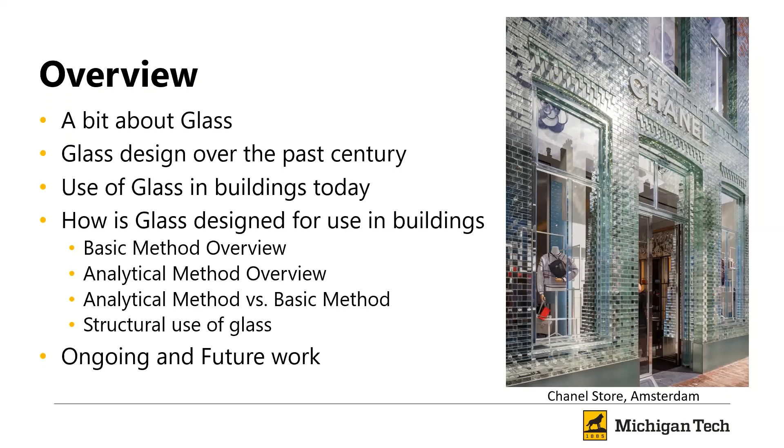We're going to do a quick overview of what we're going to talk about today. I've geared this presentation with the assumption that most people don't know a lot about glass or how we design glass. So I'm going to go through some of the common design procedures used in the US currently, and then discuss where we're moving on the committees as far as adding expanded ability to design new things. I'll also talk a bit about structural use of glass, because it's becoming very popular. For example, the Chanel store rebuilt a few years ago in Amsterdam has an entire front facade made of clear glass blocks assembled together, making a very striking, mostly transparent facade for that building. Really neat.

All right, so let's talk a little about what glass is. I'm going to talk specifically about soda lime glass, which is what we typically use in architectural and structural applications. First and foremost, it's a brittle material, meaning it deforms elastically up until a point and then fails, often without any notice or indication that it's about to fail. It usually fails at relatively low stresses. So as far as a building material goes, this is not an ideal material to use for structural design.

Over the past century or so, glass has typically been used to separate the outside from the inside—in other words, windows in buildings. Before the 1950s, this product, glass, was basically just specified by the manufacturers that created it. Between the 50s and 80s, there was a big push to come up with some sort of design procedure that designers and engineers could use to specify glass for buildings, moving it away from just being a product provided by a manufacturer.

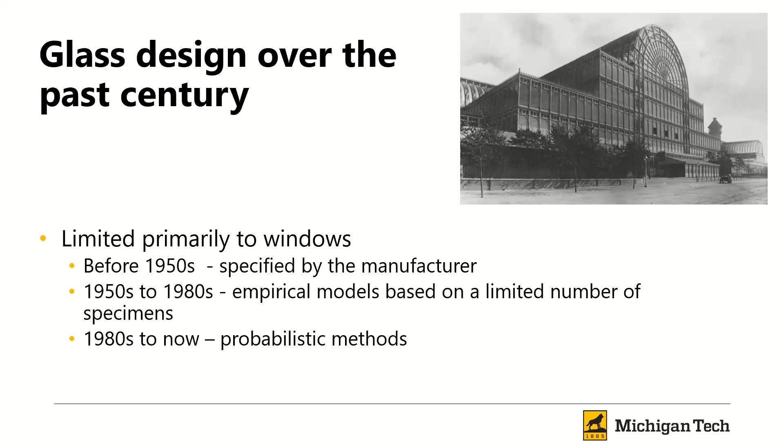Before we get to that, I want to talk a little bit about how glass is used in buildings, and what are some of the common constructions that we see.

So we can have a single glazed, or just a single piece of glass. This is more typical of what we saw years ago. We were just trying to close that opening for a window, and we weren't as concerned about the thermal conductivity of heat loss through our glazing.

Well, that's become something that's very important to us because we want to try to make these buildings as energy efficient as possible. And so as we kind of advance, we switch to what are insulating glass units.

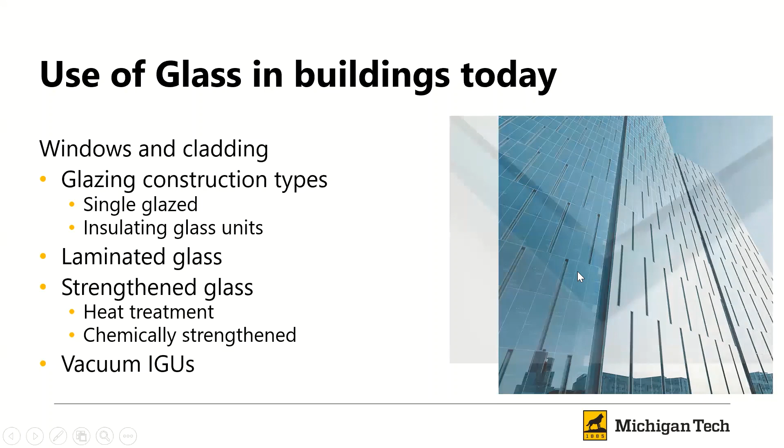And that is defined as where we have multiple plies with airspace in between them. Because the temperature and thermal radiation has to transfer from different materials as it passes through, it does a really good job providing insulation. So most contemporary houses and structures are going to have some form of insulating glass units in them.

Another type of glass that we see used in buildings is laminated glass. This is where we have two pieces of glass with a plastic interlayer in between them.

And with that, it provides some safety performance to where...

Oh, okay. Hold on while we address that. Anyway, I'm going to keep going.

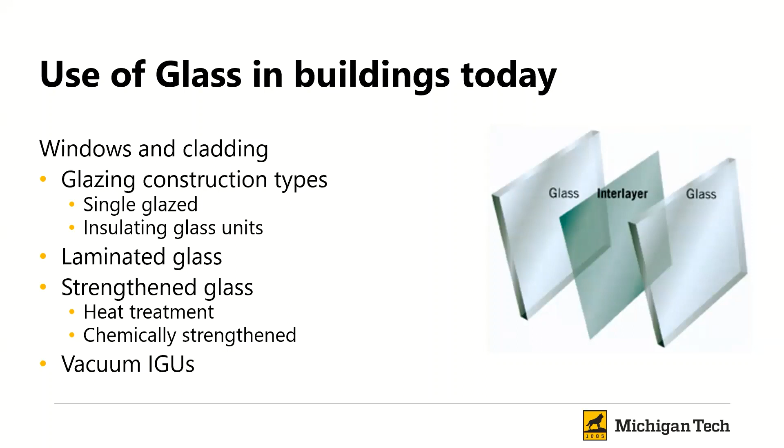And also provides some post-breakage performance advantages. Whereas if we break a piece of laminated glass, it generally stays all in one piece, and we don't have glass falling out of the building. So some nice attributes there.

We can also heat treat glass, and with heat treatments, we start with basic annealed glass, and this is where, when you throw the baseball through it, you have these big shards that fall out of the window.

As we do heat treatment to it, we can get all the way up to what is tempered glass, and this is what we think about most commonly when one of the car windows on the side of your car, in the door, breaks, and it breaks into little bitty pieces, okay? So that is because of that heat treatment.

Something that's become much more popular in the past few years, especially for small personal electronic devices, is chemically strengthened glass. This is where they take thin pieces of glass and through a process can strengthen the surface of the glass. We're going to talk about how that works here in a second.

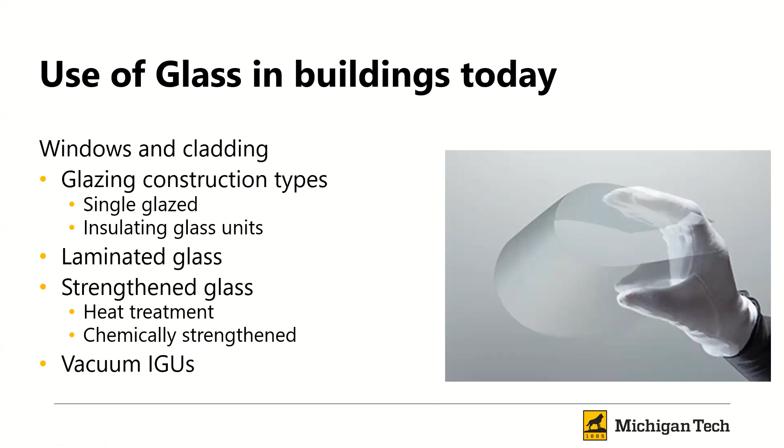And then something that has become more prominent over the past 10 years or so is what is vacuum IG units. This is kind of an advancement over the insulating glass units where we had air in there. We're going to take this a step further, just like we use with our insulated mugs and so forth.

We're going to take those two pieces of glass and create a vacuum in that interior space. In order to make that work, we have to have little pillars that keep the glass separated, okay? So now, because we've removed the material between the two pieces of glass, it really limits the amount of heat transfer that can pass through the glass.

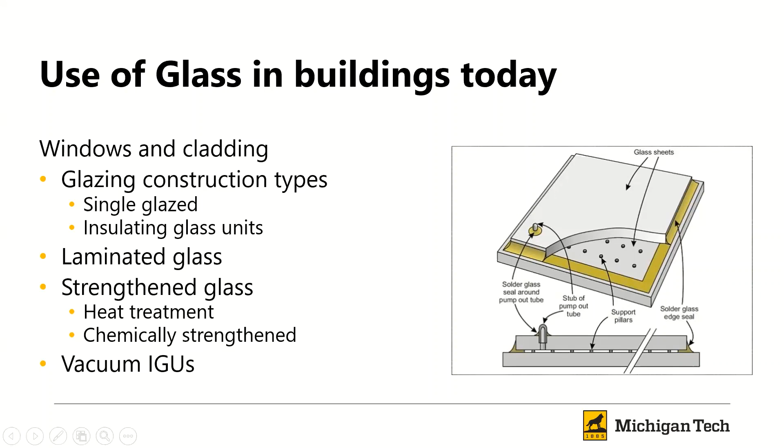And the advantage of these compared to insulating glass units is that they are very thin, for the same amount of thermal insulation, if you will.

So for our discussion today, I'm going to define architectural use of glass as basically windows and our doors, where we are separating the outside environment from the inside environment of the building, okay?

Generally, they are designed to resist their own self-weight and environmental loads, so wind loads, snow loads, anything else that would impact a window or a door under normal use, okay?

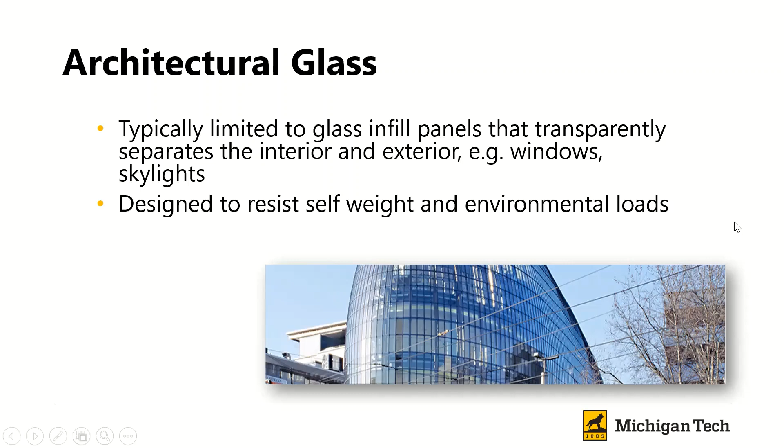So some prominent examples that we've seen over the last few years, the Shard in London.

Oh, okay. Now we're there. They don't have me. But they have this, hopefully they have that. Yeah. All right, now I'm back. Hi.

Inside is shops and community spaces where people can hang out. It's kind of a neat space.

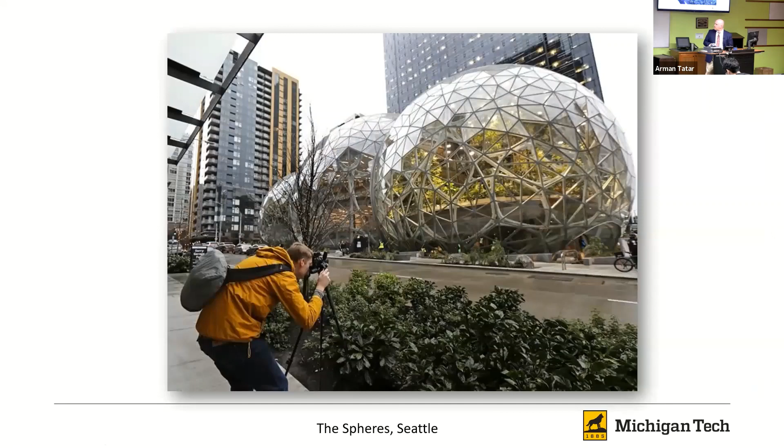And then some other ones that we've seen recently, the Spheres in Seattle, the Amazon Spheres. I recently had the opportunity to visit this, and it is a very striking building, both architecturally and just the glazing with it, because there's quite a few different pieces of glass, and most of them are triangular, but not all of them.

So it's a neat looking building, and if you get a chance, you should go check it out.

For our purposes, we're going to say structural use of glass. What is different is that this is going to be glass components that are going to carry load from something else. They could carry load from adjacent members that they are supporting. For example, we have glass fins supporting a tall glass facade, providing lateral support for those individual exterior windows. All sorts of different ways of using this, but the key thing is that in addition to its own self-weight and environmental loads, it's going to resist loads transferred from other elements.

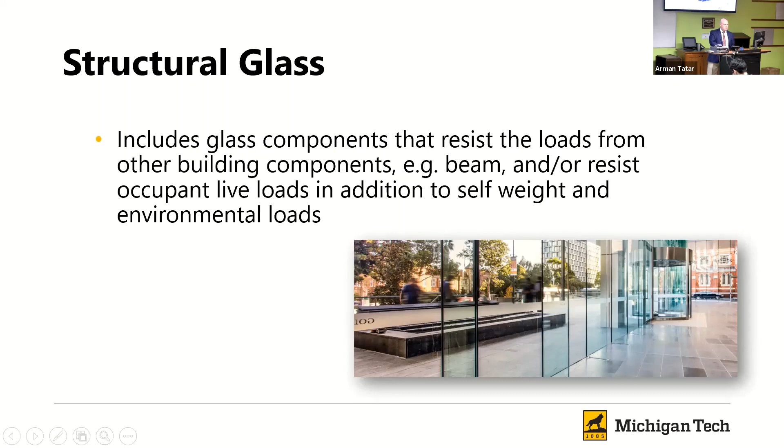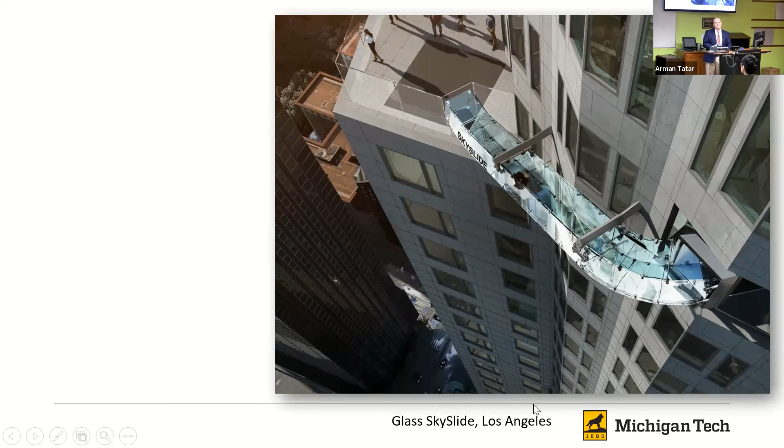Another one is the SkySlide in Los Angeles. You can go up to near the top of this structure and slide down from one floor to the next. Albeit on a blanket, but it's pretty amazing to be sliding down a glass floor. As you can see, they're literally just hanging over the side of the building here.

And so what we want to do is figure out how do we do that safely. So let's talk about glass strength in general, and what is the reason why it fails at such a relatively low tensile stress.

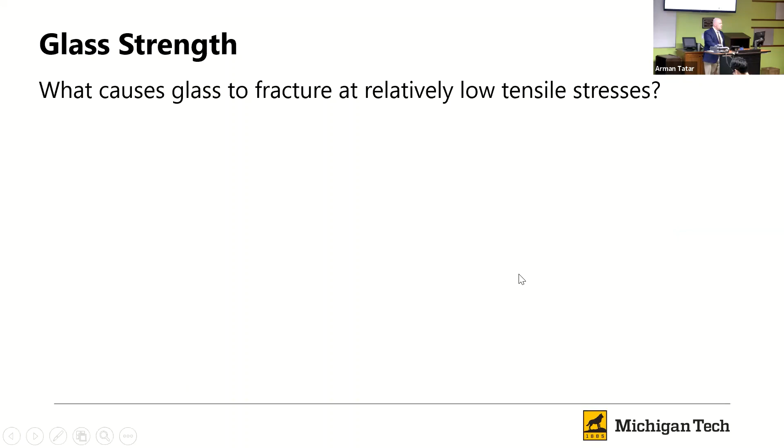The primary reason is that all over the surface of glass, we have these microscopic flaws in the surface, and those can be caused naturally as the glass solidifies. They also can be changed or modified or added through in-service conditions. That could just be from the environment interacting with the glass, or it could be cleaning or touching or otherwise—all sorts of ways.

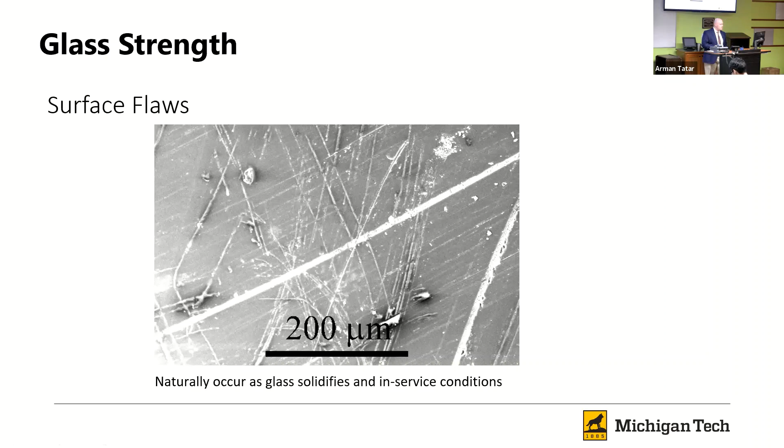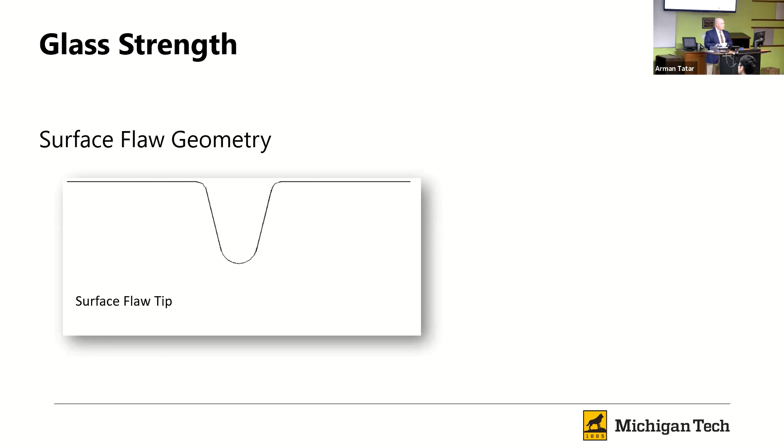But basically we have these little flaws, and what goes on with these flaws, we kind of model this as a side view, zoomed in, looking through the thickness of the glass. We have this little flaw here, and if we provide some tensile stress, that's going to tend to sharpen the tip of that flaw. And if we create enough tensile stress and get that flaw sharp enough, then we're going to have a large stress concentration, many times over what the original tensile stress was, to the point where we create fracture, okay?

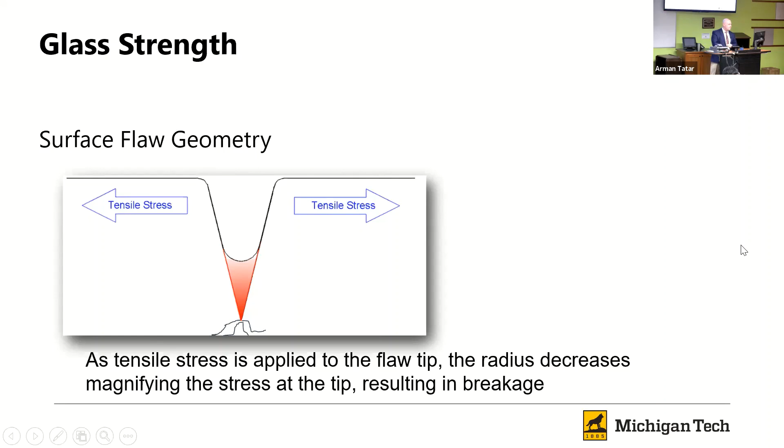So if we could eliminate these flaws, then we would have much stronger glass. And in fact, when we chemically strengthen glass, that is what they are attempting to do—to use, among other things, certain salt mixtures to basically fill in some of these flaws where we're not allowing them to grow. They're still there, but we've kind of covered them up, if you will.

All right, so how will we go about designing? Now we don't really know where these flaws are going to be. We don't know if they're going to be at the point of our maximum principal stress. This becomes more of an issue when we work with structural elements, because we're going to have all sorts of different edges and stress orientations that would be different than the way we deal with windows or plates of glass.

So one option would be: we can pick some limiting stress that we think is going to be okay, and we can just assume that the fracture is going to happen where the maximum stress is located, okay? But what we find, especially with windows, and especially for annealed glass, is that when we break glass under load, it doesn't always fail there. In fact, it often does not—the fracture origin does not occur at the same spot our maximum principal stress was at. And so that causes us some concern, because we may actually be failing at a lower stress than our maximum principal stress, and furthermore, at a location other than the maximum principal stress. So that makes it a little more difficult.

We also find that not only does the magnitude of the stress matter, but also its orientation. If our flaw is oriented such that the tension is running parallel to the flaw, then we're not changing that flaw tip. It has to be perpendicular.

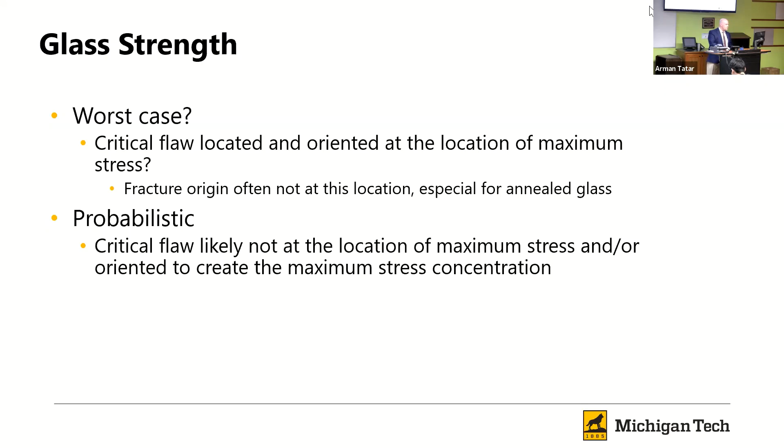Anything that's off angle from that is going to lower that stress concentration. So where we get into that is, can we use a probabilistic method?

In the States in the late 80s, a standard was advanced, ASTM E1300, to address how we specify the thickness of glass to use in buildings. It was based on a probabilistic method, and it was pretty limited. I've listed the limitations of the current version, which is 2016, which right now addresses uniform lateral load.

That works great for windows in general, but not so much for structural elements, because those have point loads. They can have all sorts of different loads that are not uniform lateral loads. In addition, it applies to monolithic and laminated glass, but only rectangular shapes.

We've all seen, in fact I've just shown some examples of glass on buildings that was not rectangular. So how do we deal with that? Currently it addresses rectangular glass supported on 4, 3, 2, and 1 side. We've tried to open that up, but it's still pretty restrictive.

It also addresses insulating glass units for 4-sided support only, and it specifically does not apply to balustrades, glass floors, aquariums, structural glass members, and glass shelves. So clearly we can't use this to design our structural glass elements.

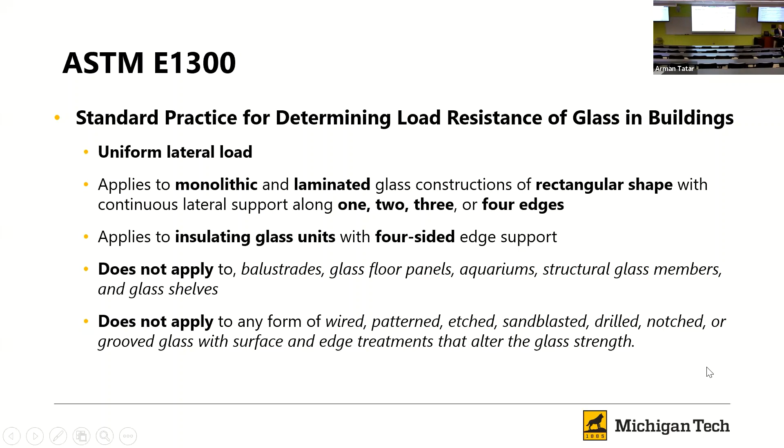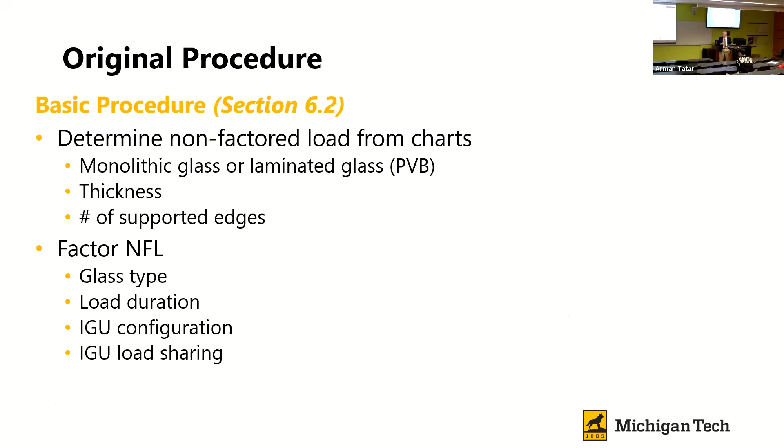So up until 2016, the original procedure was that we used a series of charts - I'll show you one of those in a little bit - based on the different standard thicknesses that plate glass comes in, and also the number of supports that it's supported by.

Basically we'd go in there and get a non-factored load from that, then go through a series of steps to modify that non-factored load for glass type - if it was heat strengthened or fully tempered, if it had a longer load duration than a typical wind load. Also we had an IGU configuration, so different thicknesses of glass in our IGU, and the load sharing for those different thicknesses. All of those pieces were in there for factoring.

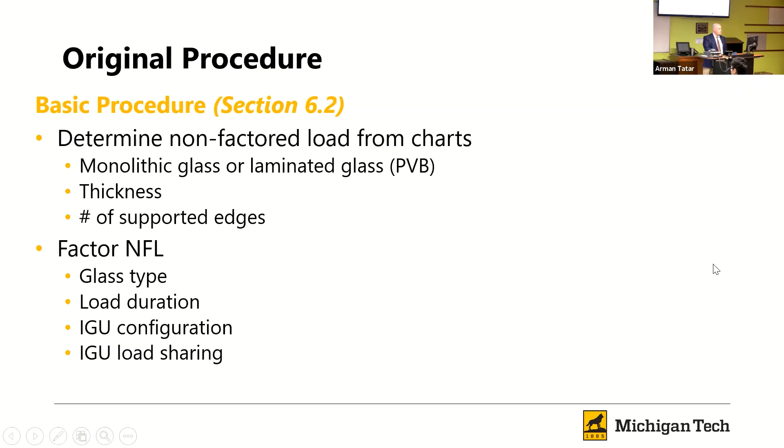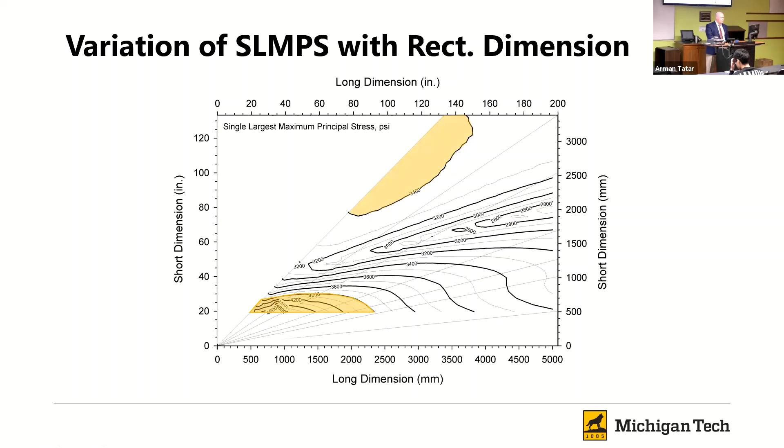So there is not a single stress that we're designing glass with, and this is kind of an artifact of that probabilistic method that we've been talking about. I'm going to go into a little more detail on that shortly. All right, so a little sidebar there.

After we have our non-factored load, then we would use factors to address for heat treatments, also for load duration. We have separate charts for laminated glass because the presence of that interlayer changes the way the stresses pass through the interior of the glass, or through the thickness of the glass. And then we have a relatively simple model to deal with load sharing between our two pieces of glass, depending on if it's a double or triple insulating glass unit.

And so each of these things has its own limitations, but we've been using this method for about the past 30 years, and glass isn't falling out of buildings due to wind load. And so we feel like this method has been working just fine, but recognize that all those limitations we had at the very beginning, people want to do larger pieces of glass, different geometries, different constructions.

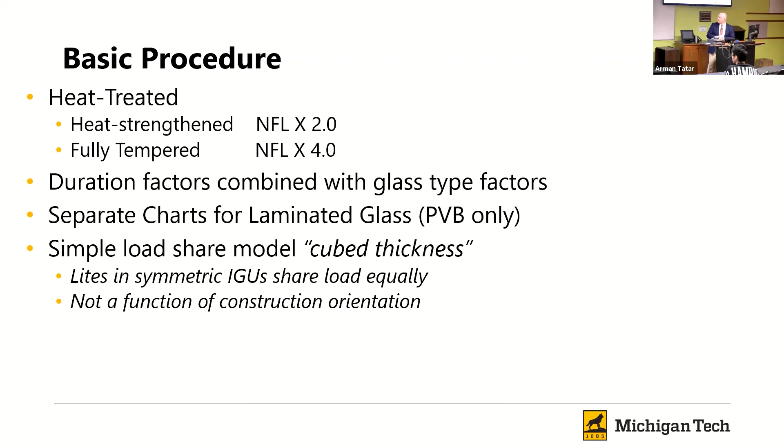We have new products that are coming available, like different interlayer materials that have other positive attributes that we'd like to take advantage of, that just aren't addressed in the basic method of the standard.

So to address that limitation, the committee that oversees the standard worked over the past few years to create what is an analytical procedure. And basically, we gave the user the methodology that was used to create those original non-factored load charts, so they could use it directly with their own in-house stress analysis software, say like finite elements. And they would basically have the methodology to either recreate a chart if they wanted to, but most importantly, use that method directly for whatever kind of configuration they have.

So for a couple of reasons I'll mention: it was limited to 4-side support glass. And it does directly let you use the glass failure prediction model, which I'm going to show you a shortened version of really quick.

And then we also allowed, instead of just using a simple factor of 2 and 4 for different heat treatment types, you can measure the residual compressive surface stress of heat-treated glass, and you can use that directly.

The way the standard is written is that heat-treated glass has minimums for residual compressive surface stress for those to be considered either heat strengthened or fully tempered. And the standard requires you to use the minimums for design because you don't know what you're going to get.

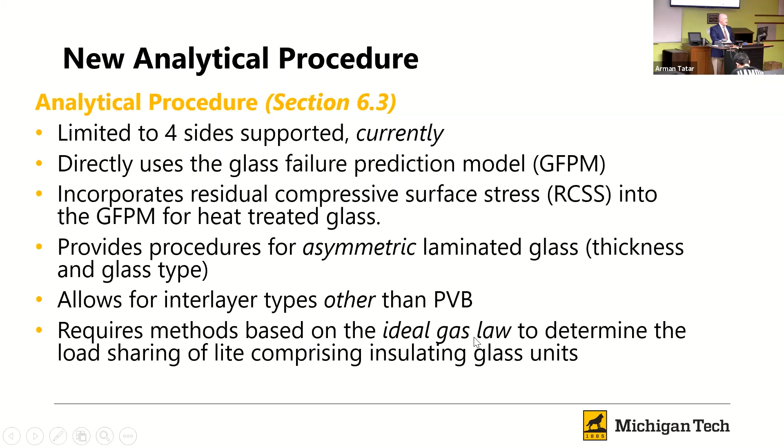The idea here is that when we apply a load to one ply, it compresses usually the airspace in between, thus increasing the interior pressure, and then that is transferred to the second piece of glass. There's some equilibrium that occurs there, and it follows the ideal gas law, because just as we reduce the volume, pressure goes up. The other lite is going to deform a little bit, so then we're lowering the volume, or we're increasing the volume again, so pressure comes back down. You get the idea, okay? So we need to take that into account to get accurate load sharing estimates between the 2 pieces of glass.

Something I haven't touched on is that the original standard was predicated on a probability of breakage of 8 in 1,000, which sounds like a really weird number, but that's the number that's in there. The idea would be that we had to perform our glass failure prediction model calculations and figure out, for a given geometry - rectangular dimensions and thickness - what was the load that would give us a probability of breakage of 8 in 1,000? So that's kind of an iterative procedure to guess.

But for our purposes, when we're going to use the analytical procedure, we don't really necessarily care about what the full load resistance of the unit is. We just want to make sure that whatever we have for the load we applied to it has a probability of breakage that's less than or equal to 8 in 1,000. If we have that, we're done.

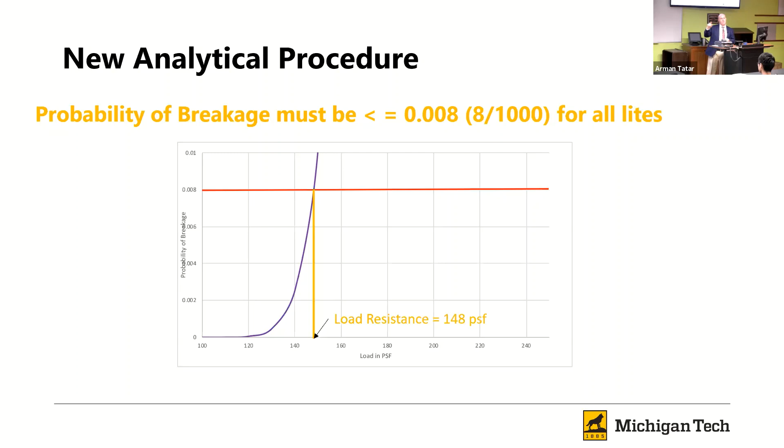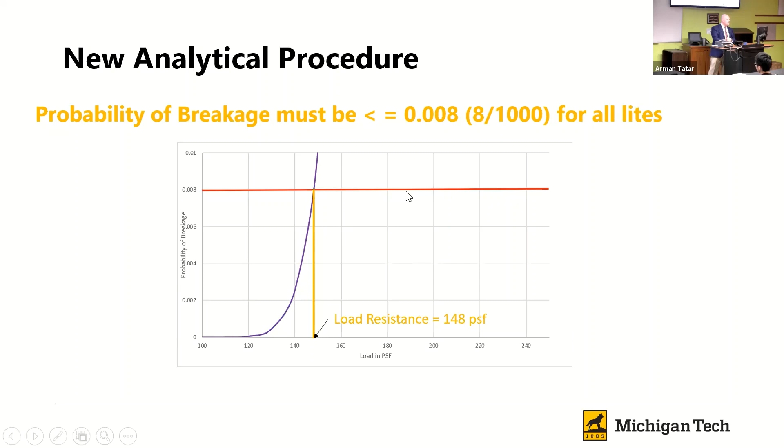Now, if we were curious about what the capacity would have been, then we could go through this process and walk it up and figure out what is the magic load. Depending on the construction, that may be 5 PSF away, that may be 10, 15, 20, depends on what it is. So it can be something close, or it can be something quite a bit higher depending on where we're at. So this is that glass failure prediction model that I was mentioning.

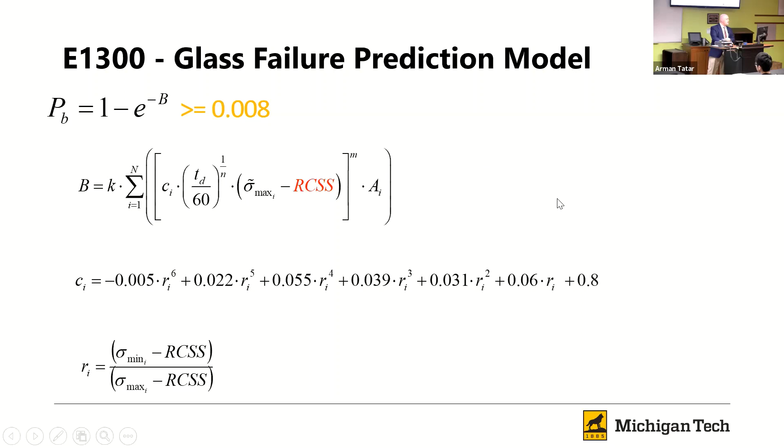I'm not going to go into a whole lot of detail with it because nobody wants to look at a bunch of equations. But the key things here are that we see duration, that's TD, so we can take that into account. We have RCSS here. We also calculate the representative areas and stresses associated with those. So this is where our finite elements packages are going to come into play. And then we just have to sum this up in the calculation.

Without a whole lot of effort, one could translate these equations into a quick little Excel spreadsheet calculation. All you have to do is do your analysis in FEA, copy those stresses and areas out of that program, paste them into your Excel spreadsheet. Voila, you can calculate the probability of breakage. So that's not too bad, even though these equations look kind of nasty.

This C here is a polynomial that was created to represent the biaxial stress correction factor. That's what this actually does. And this has to do with adjusting our probability for whether or not our stress is at a particular angle with respect to the flaw, okay? So it's kind of taking that into account. And it's based on the ratio of the minimum and maximum principal stresses.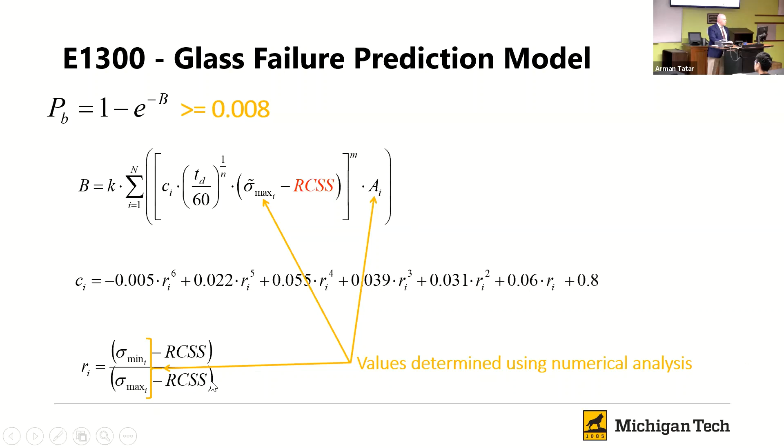So again, this is the same procedure that was used to generate the charts that are in the standard.

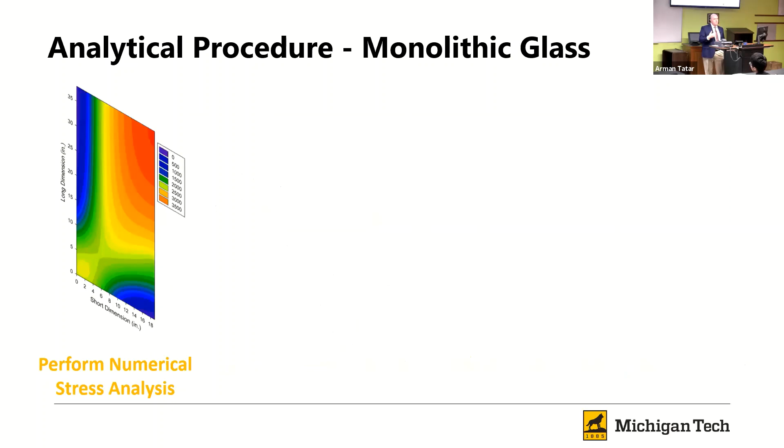So how would this work? For a piece of monolithic glass, a solid piece of glass, we're going to perform our stress analysis. We're going to plug that into our whiz-bang spreadsheet that we just made. And we're going to check and see if we're less than or equal to 8 in 1,000. If we are, we're good, we can move on. If we're not, then we need to make a change to our design, either make it thicker glass, heat treat the glass, do something to get that number to come down. So we have some options there. I'll show you some examples here in a little bit.

For laminated glass, we have two methodologies that the standard allows you to use. One is the effective thickness model. Because layered plate analysis is somewhat complicated, and we need to be able to model that interlayer appropriately, you have to have a fairly sophisticated FEA package to do that accurately, and it also tends to take a while as far as doing the calculation.

So what the standard allows you to use is a fairly simplistic method: come up with an equivalent monolithic thickness that would be representative of the laminated glass. Then we can use FEA with monolithic glass and these effective thicknesses to do our stress analysis and check for deformation.

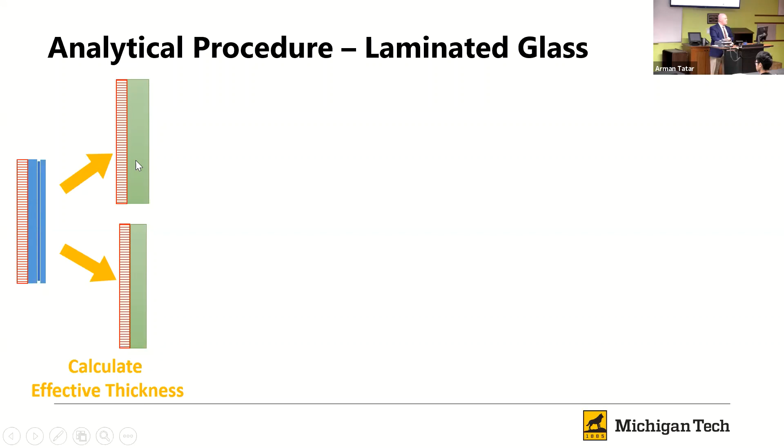So I have over here an asymmetric laminated piece of glass, and with that we would expect our two effective thicknesses to be different, and then we perform that stress analysis. We plug that into our spreadsheet to do the glass failure prediction model, and we use the principle of weakest link: whichever one gets to 8 in 1,000 first is the one that limits our design.

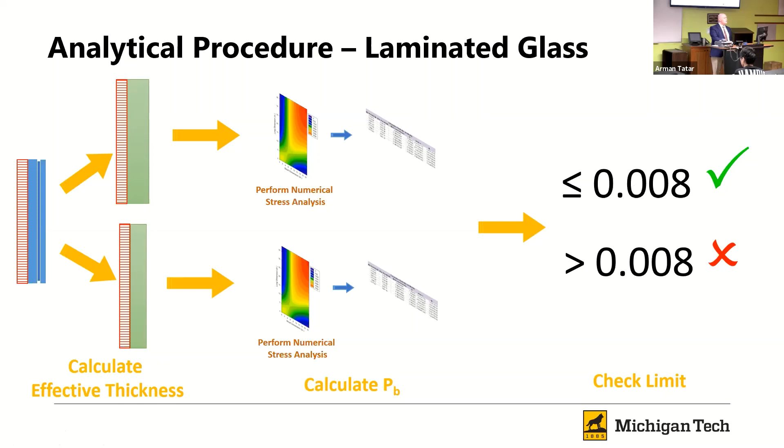So we just take the largest of these two probabilities of breakage, and make sure that is less than or equal to 8 in 1,000. If either one of them happens to be larger than this, then we have to make a change in our construction because one of the plies doesn't meet the requirements.

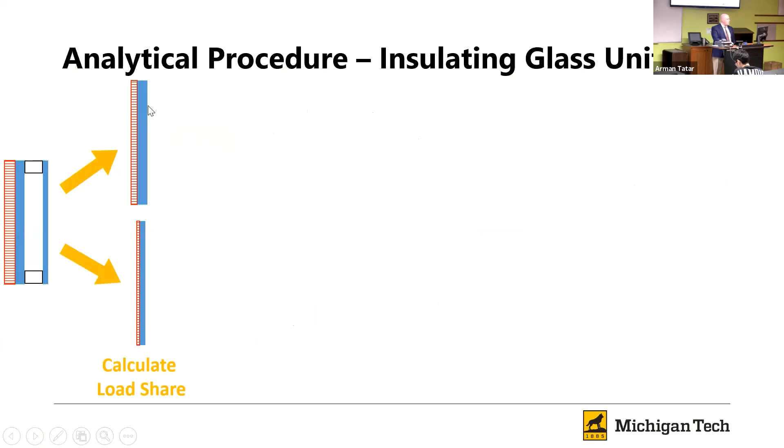We'll see a similar procedure when we use insulating glass. With insulating glass, we now have two different pieces of glass that we have to analyze, and we also have to deal with the load sharing between those. Very simplistically, if both pieces of glass were the same thickness, they would share the load somewhat evenly—not exactly, but close to 50% each. As those become different shapes or different thicknesses, that moves around.

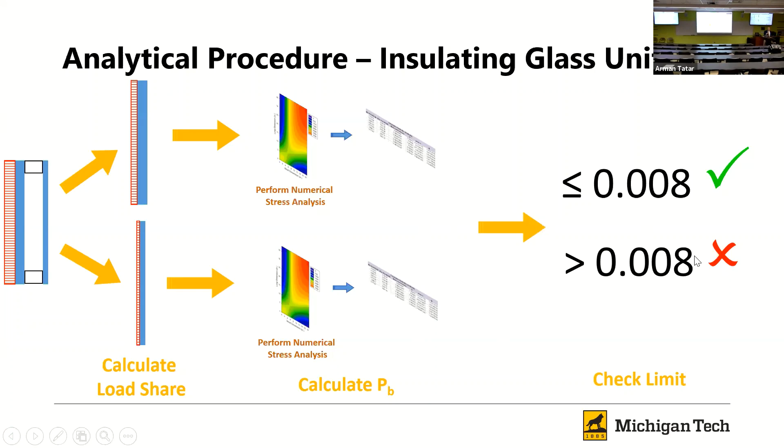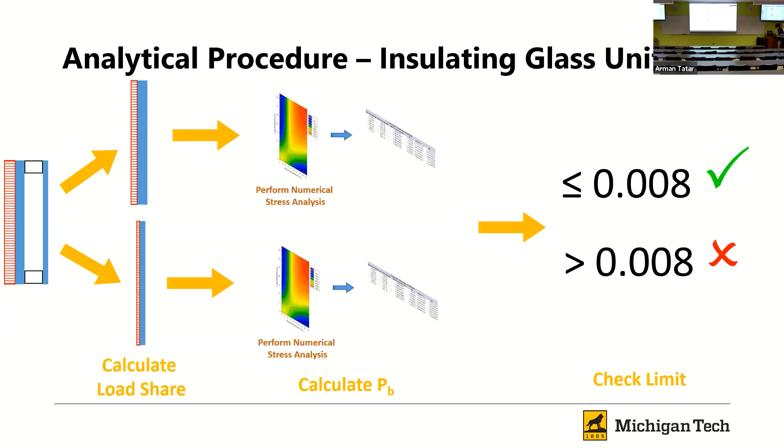Then we perform our numerical analysis, and again, same principle: weakest link is where we check the largest of the two pieces of glass and make sure we're at less than 8 in 1,000. So that's not too bad. We could see that if one of these was laminated, we would have to branch out and do 3 stress analyses to make that happen, potentially if we're using the effective thickness model.

The other alternative is to model the laminated glass directly as a layered system, and then you don't have to worry about doing the effective thickness model.

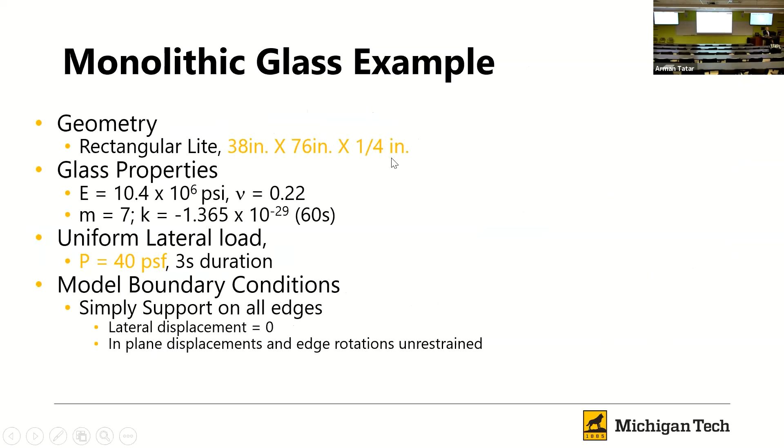So what would the procedure look like? Let's say I wanted to design a piece of glass that was 76 by 38 inches, 1/4 inch thick, and I want to see if it can resist a 40 PSF load. We key that into our FEA program of choice, and we get a whole lot of stresses, presumably in some sort of grid, depending on how you do it. So all I've done is table those values here. Don't expect you to remember all these things, but the idea is we have those, and we have the minimums, and we have tributary area that comes out of that.

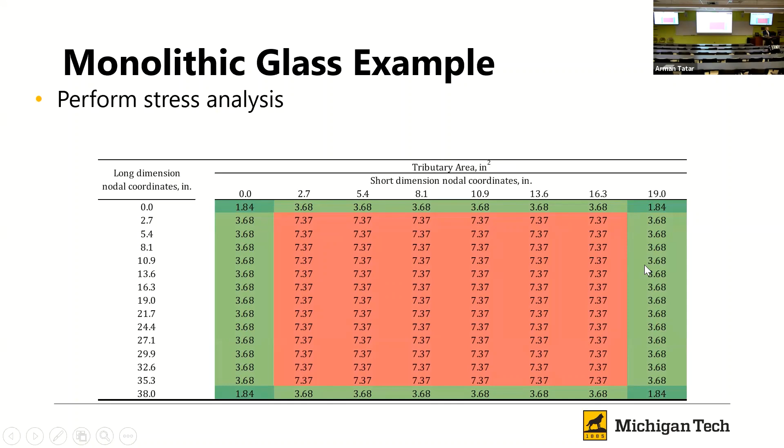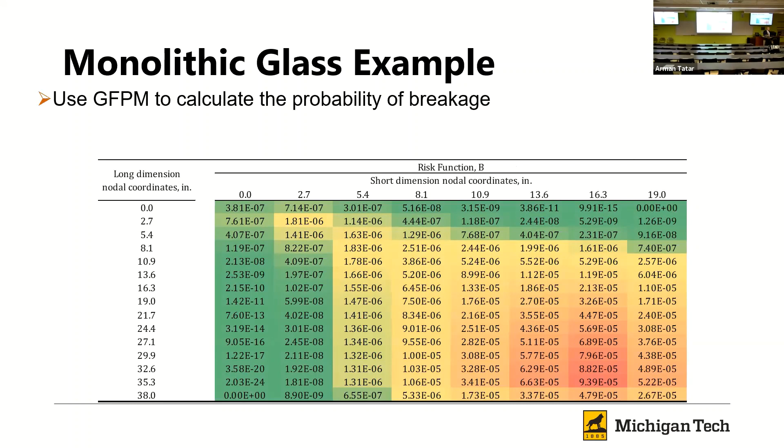In this case I used a uniform grid in my example. Then we plug that into our spreadsheet, and we use those ratios—the maximum, minimum principal stress at each point—to come up with our biaxial stress correction factor. That was C, right? Then we bring all that together into our summation, which was B, and then we can finally calculate our glass failure prediction model, or probability of breakage. In this case we came up with 6.48 times 10 to the minus 3.

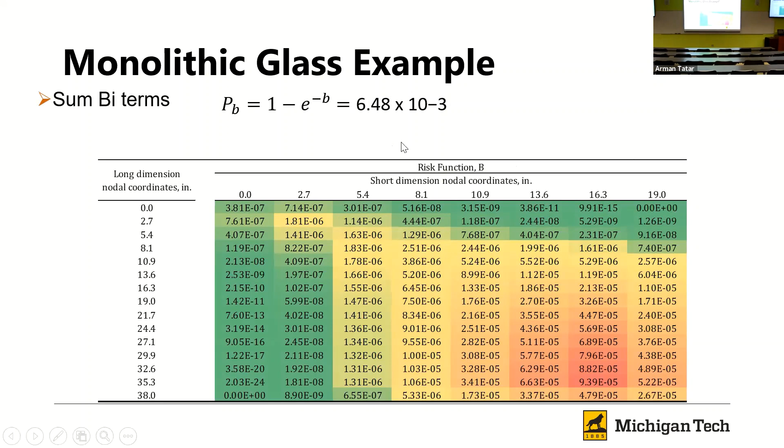Which is less than our 8 in 1,000, so this design works. It's close to being maxed out, so its load resistance is probably a little bit higher than 40, but not much higher than 40.

We perform those effective thickness models and calculated probability of breakage, and we see that one of the lites worked and one didn't. Interestingly, in this case, the thinner one did not work. But that's depending on how it works and what heat treatment you have, that can flip around.

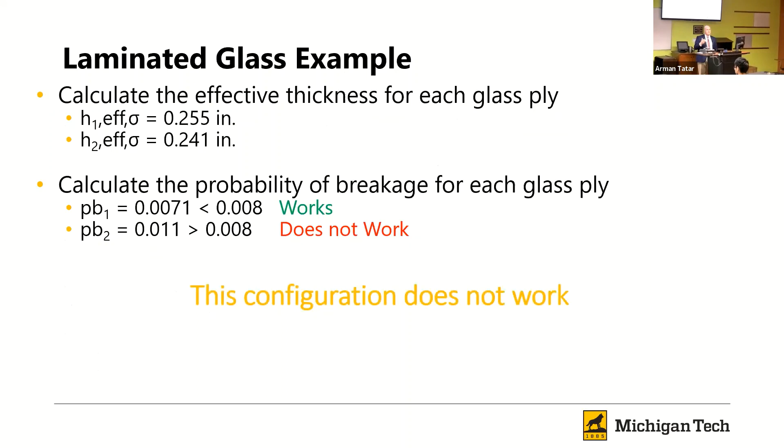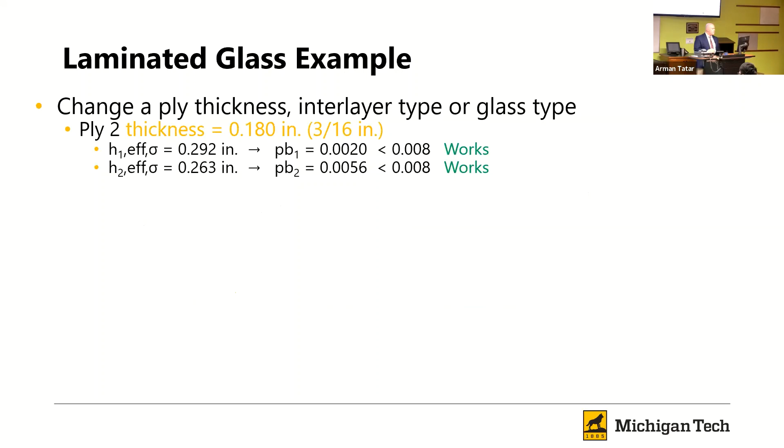So since that doesn't work, this design doesn't meet our requirements. So what can we do? What can we change to fix that? Well, I could increase the thickness, make it a little thicker. And we see that now that works. So just increasing one of the ply thicknesses fixed our problem.

Alternatively, we could have used a stiffer interlayer. So instead of using the PVB interlayer, I could have used something more consistent with an ionomer interlayer. And we see that G value goes way up, and now it works. So I didn't have to change the glass thickness, I just changed the interlayer I chose to use.

Also, I could have chosen to heat treat that ply. And we see that when we do that, that one goes way down, okay? So we have several different options there on how we can change the configuration and make the system work.

Previously, because it was just based on pre-calculated charts, we didn't have these options. Either we could heat treat all of it, but we didn't have a way to check for different interlayer properties or for different thicknesses of glass. We didn't have that option. We just had to choose a thicker construction.

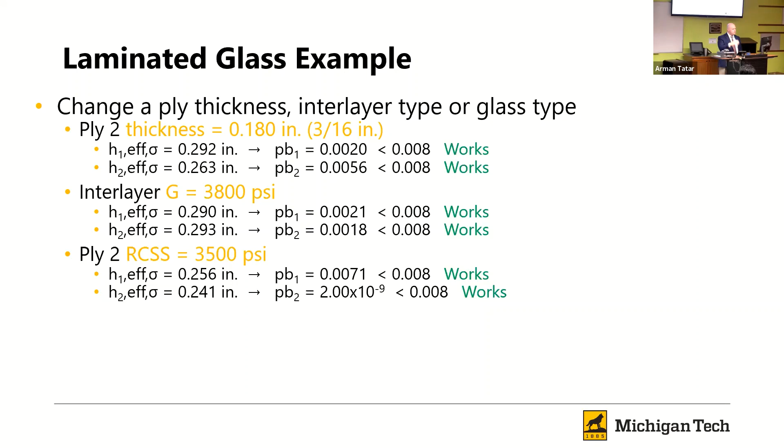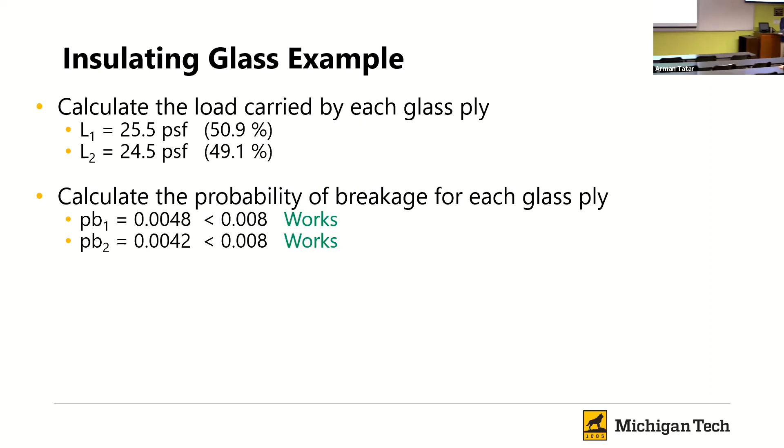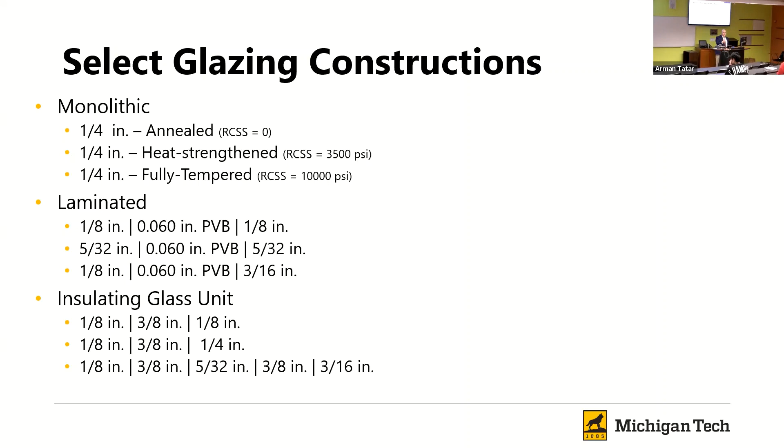So I'm going to give you a couple of comparisons. One of the questions is, you've got these two different methods, how do I know which one to use? I want to show you a couple of comparisons, going through these quickly, just to see how much difference it makes when we use what we had previously, the basic method, versus the new analytical procedure.

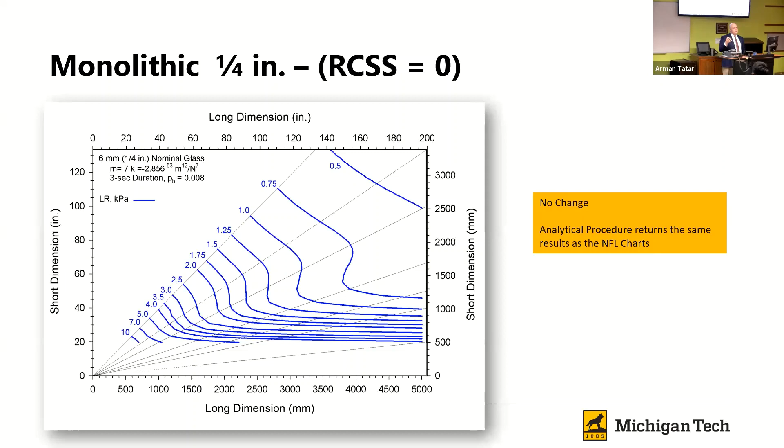So for monolithic annealed glass, there is no change, because this is exactly what the charts in the standard were, so there's not a difference there. This is the same chart that we had before.

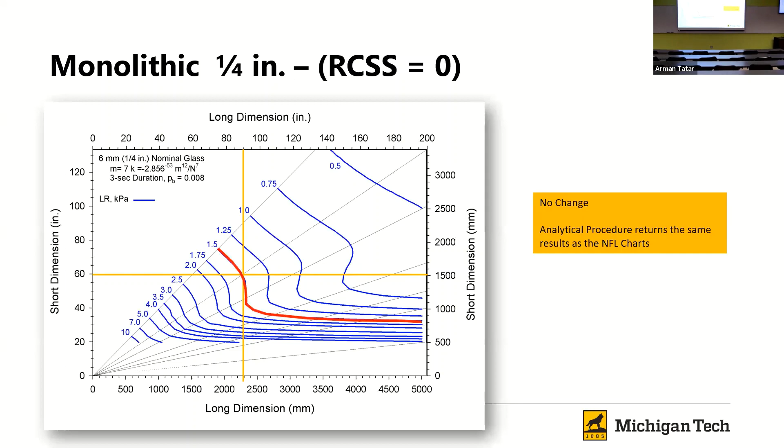Now, if I want to go to heat strengthened glass, the process there would have been we took the non-factored load chart and multiplied by 2. So we'll see all these numbers increased by a factor of 2, and I just redrew the chart, or really just adjusted the numbers. Then if we were to use the analytical procedure using the glass failure prediction model, where we now took the RCSS to be 3,500, which is the minimum required for heat strengthened glass, we see that we have load contours that look like this.

And so those moved up quite a bit. This was a 1.25, you can see it in green, barely down there. And then below is, and now it's up to a 1.5. So we get a sense that it increased, but it's not real clear how much or where it increased.

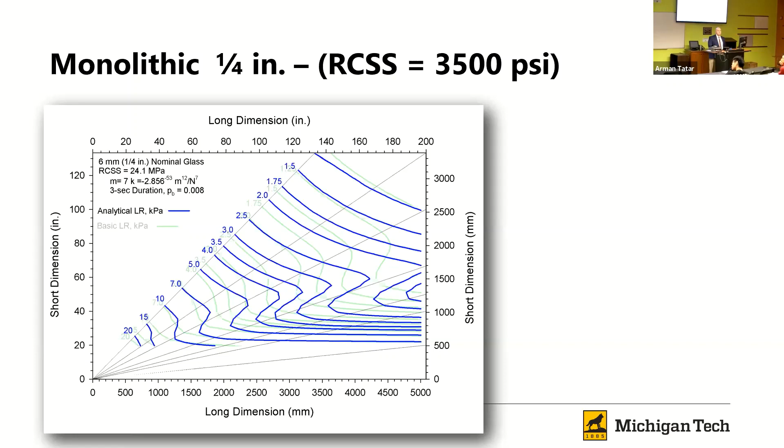Otherwise, just taking advantage of the RCSS and the glass failure prediction model gives us a pretty good boost on the strength of our glass. Now, it's not to say that the glass automatically got stronger because we changed the design procedure. The way I like to think about this is that we knew the glass was stronger than what we were designing it for through experience.

And what this method allows us to do is design our glass where its capacity is closer to reality than it was before. Whenever we design anything, we don't want to be in a situation where there's this big fuzzy area. We know it's stronger, but we're not real sure how much stronger it is. But we're pretty sure it's okay. And you can see how that can lead to making bad decisions potentially when you start leaning into that fuzzy area. So this is going to tighten that up for us a bit.

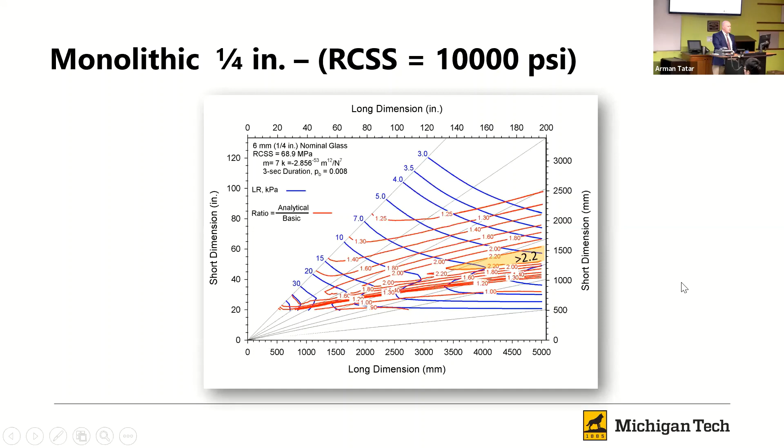Again, same principle, they don't leave it at the minimum. They usually go a little bit higher than the minimum to guarantee they don't have one slip through that drops below that. So I'm going to go through these a little bit quicker. If we compared the laminated glass to the charts, we see that the effective thickness model overestimates the strength of our laminated glass for aspect ratios around 1, up in this upper region of my chart. So that's not ideal, there's some issues there.

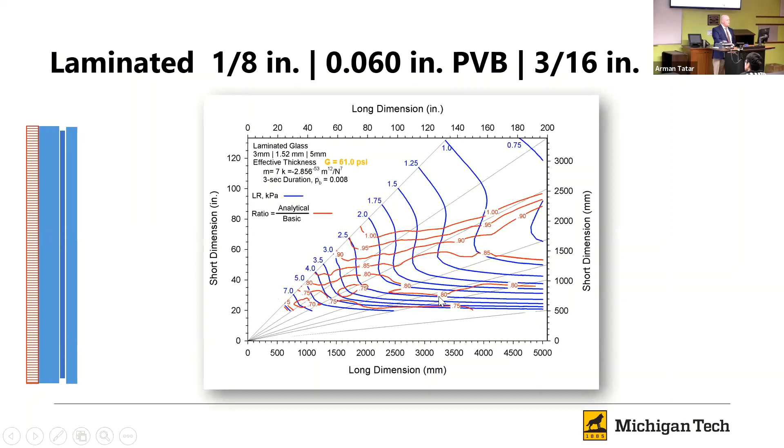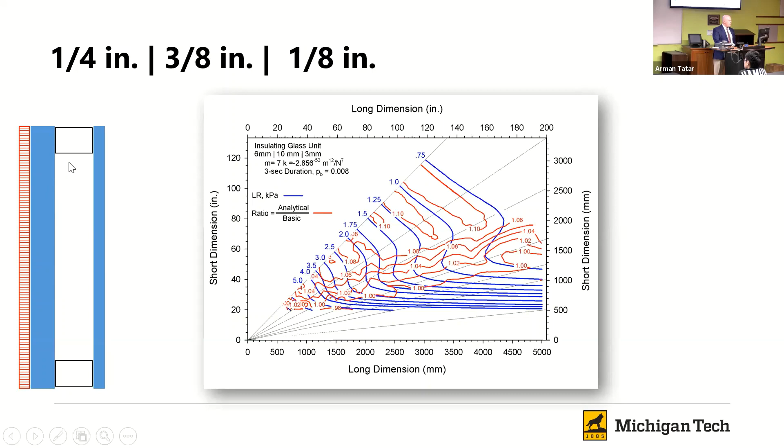In your residential usage of glass, your windows at home are usually symmetric. But we're seeing high-end high-rises going in with constructions like this, not always. In northern climates, we're going to see more triples because it raises the insulating factors.

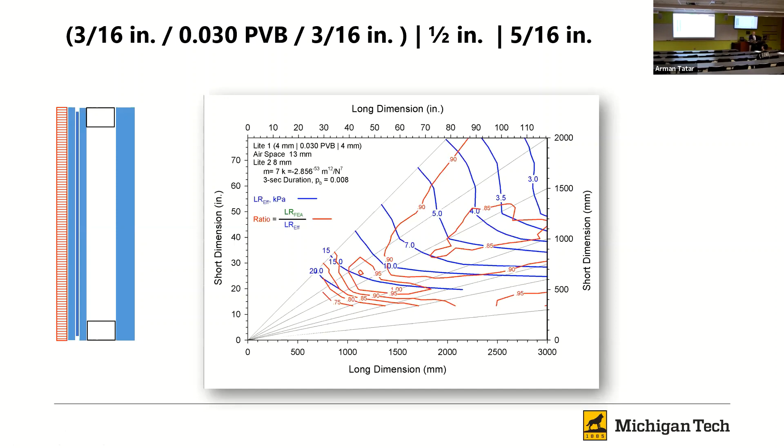In this one, I did a bit different analysis. I wanted to compare using the effective thickness method versus a full layered FEA model, to see how well the effective thickness model worked compared to a full FEA model. We see that depending on where we're at, there can be upwards of 10 to 15% difference, at least in this construction. Different constructions can show even more.

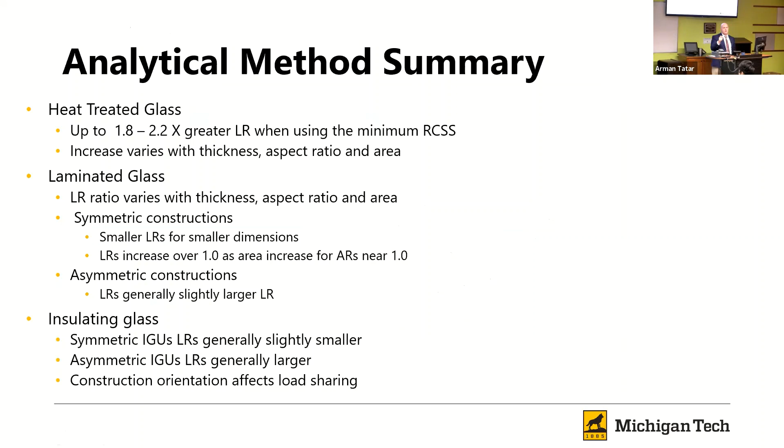So for a summary: the analytical method models heat-treated glass stronger, closer to its actual strength, but still conservative. Laminated glass can use different construction types, and so on. For insulating glass, dealing with our sealed airspace directly using the ideal gas law, we get better load sharing estimations between our pieces of glass. Those are important.

I want to give a quick update on what's coming up in changes to the standard - stuff that's in the pipeline. I mentioned before that the charts in the standard were limited, and people wanted to use larger pieces of glass. Part of that is a response to float lines getting a little bigger, and people being able to transport larger pieces of glass to the job site.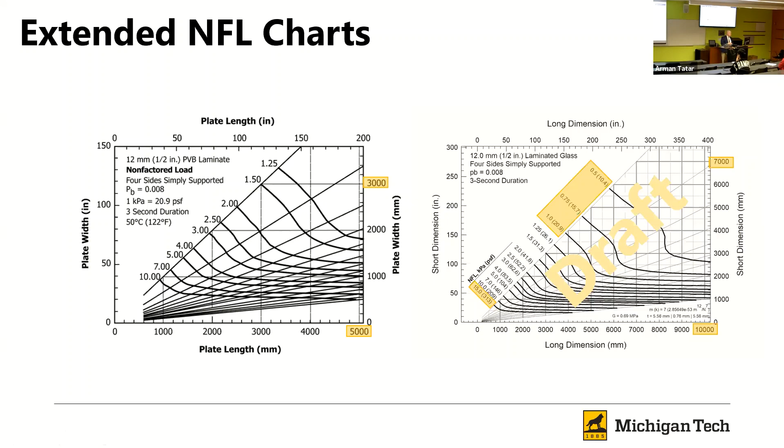But it's better to have the chart a little bigger than to come back in a couple of years when people do start making glass that big, so we don't have to redo the charts, since this is just an analytical calculation. So we can go as big as we want for the most part.

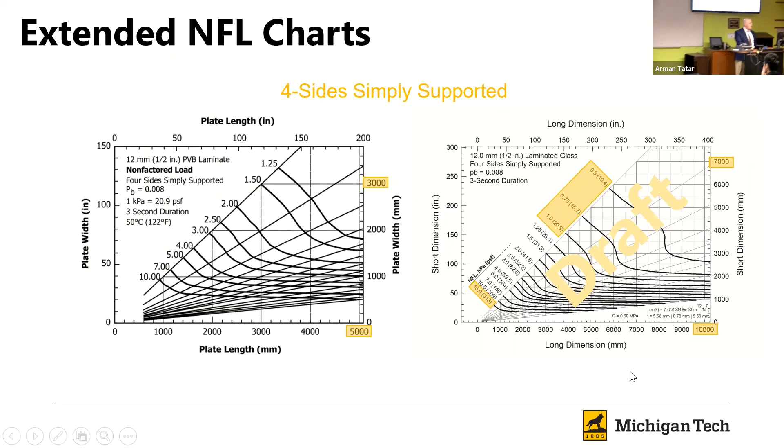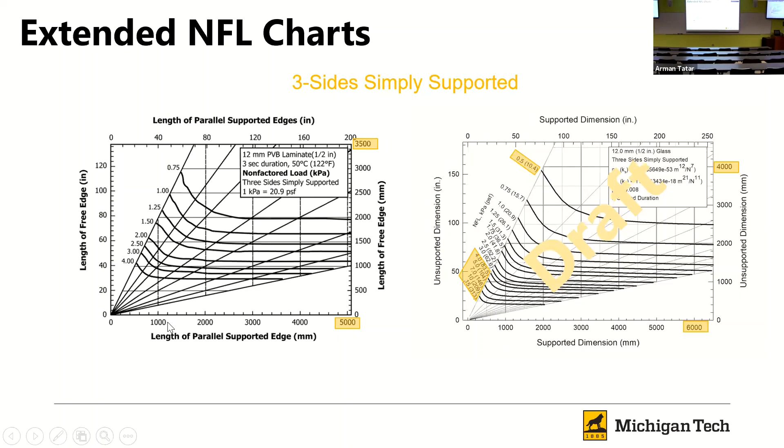So this is 4-side simply supported, and this is our 3-side simply supported chart. Notice we have a slightly different shape - the aspect ratios and extent of the chart change a bit between the supported chart and this one with an unsupported versus supported edge. In that one we added more lines, so depending on if you're outside up here or down here, you can still design those.

For 2-sided, we had a series of straight line charts based on pretty much just beam action alone. The reality is if you have a plate supported on 2 ends with a uniform load, it's going to principally behave like a beam, but you'll also see it fold in a little - those unsupported edges roll up some, because of the way the membrane action of the plate works. If we use that with our glass failure prediction model, we actually see there's a little bit of a bend to these.

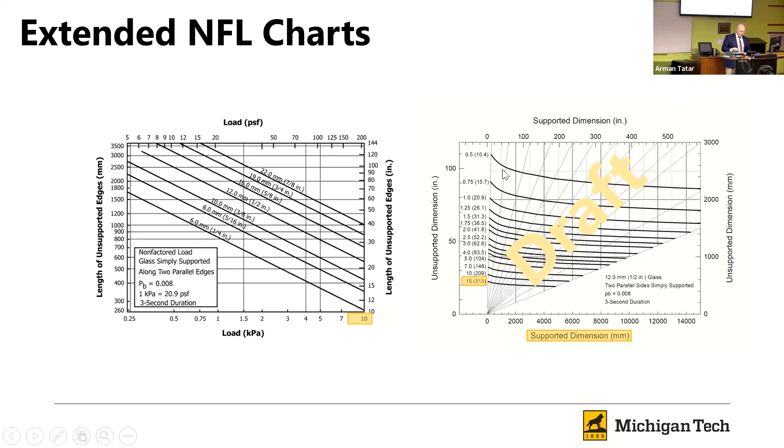So now we're going to go from one chart that had all the thicknesses to each thickness potentially having its own chart, similar to 3-sided and 4-sided. Again, these are drafts. This has not been balloted yet.

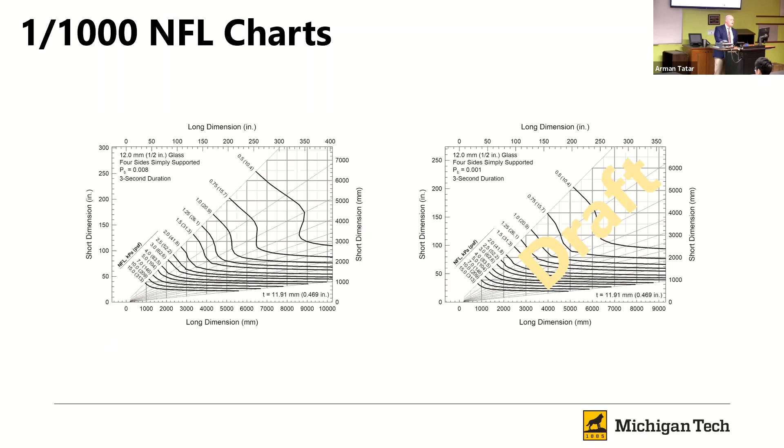2 sides. Another thing that's been happening over the past 20 years or so is that one of the prominently used skylight standards in the United States specifies that skylights should be designed to a probability of breakage of 1 in 1,000. Well, there's never been a 1 in 1,000 chart for designers to actually go look up the capacity of glass. So designers were left to make up a factor, and people have been doing that. The committee decided it would be nice if people could just use a chart that was calibrated to 1 in 1,000. So the committee is looking into the possibility of adding charts to 1 in 1,000.

You'll notice the dimensions here are a little bit less, and these capacities move down quite a bit. Now, if I were to go to the operation of dividing the two charts and ask, was there a common factor between 8 in 1,000 and 1 in 1,000? The short answer is no, but there's a range of factors.

So one could say, I'll just take whatever the worst reduction is and go with that, which you could do. But the idea is that if we use the method directly, then we can potentially come up with a more economical design. In other words, we're going to design it as the strength that we believe it is, and potentially have a little bit thinner glass on the building. Now, some might argue it depends on the geometry and depends on what you're doing, it may not make a difference at all. And that's true. But if it does, we would like to take advantage of that.

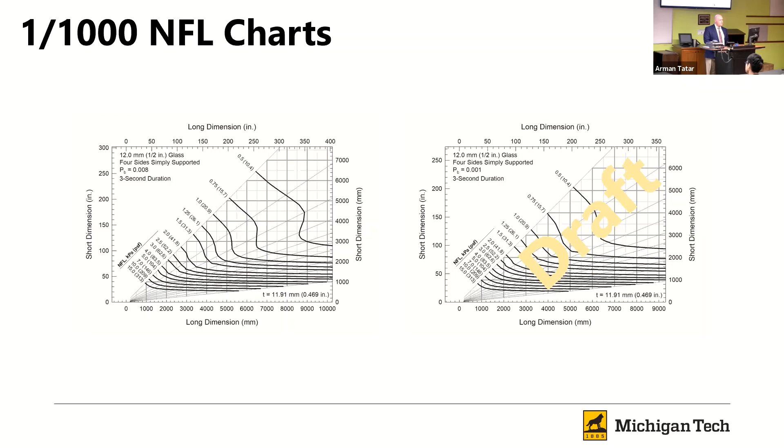Because think about it, glass was heavy, right? 156 pounds per cubic foot is the density of this stuff. We're going to clad the entire exterior of the building in it. So if I can make all the glass on the building a little bit thinner, then the entire structure got lighter. I don't need to have as big columns and as big beams to support all of that weight on the exterior of the building, and that kind of trickles down to the entire structure. And it's less glass, so the glass is cheaper. So there's some advantages economically to using what it is as accurately as we can.

A few other updates that are coming: we've added material properties. Interestingly, the standard never really defined what glass was as far as it was concerned in the standard, so we've added that. We've added some notes on where to go find material properties for interlayers. We are in the process of adding the glass failure prediction model to free edges and partially supported edges, and this is the piece that will open up the standard to use the analytical method for any kind of geometry and also for any kind of edge support.

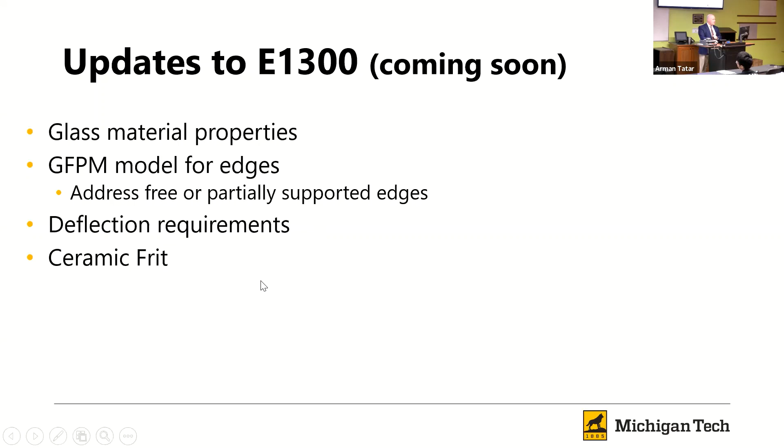Going to add some deflection requirements, and the committee is working hard on adding some advice on glass with ceramic frit. So that's being worked on.

I want to touch a little bit about the committee's work on structural design of glass. So right now in the United States, there is not a design standard that an engineer or a designer can pick up and use to design glass elements. The way people have been doing this is using their engineering judgment and their understanding of the way glass fractures and works. They make a design, and then more often than not, they have to do full-scale tests to prove that their design works. Oftentimes, they have to prove that it works for significantly larger loads than they actually need, or they're actually designing for, because people want to be reassured that it's not going to break. And that's really expensive.

So what we're trying to work towards is a consensus design standard that somebody could go in and design different glass elements with. My colleague Richard Green has been leading the charge on that for the past several years, and he and his team have actually completed a working draft of the standard. They are now in the process of going through and checking that, to calibrate and verify that it works for common glass structural elements that are used, that people have been designing for a while, that we feel comfortable with, and see if it's working.

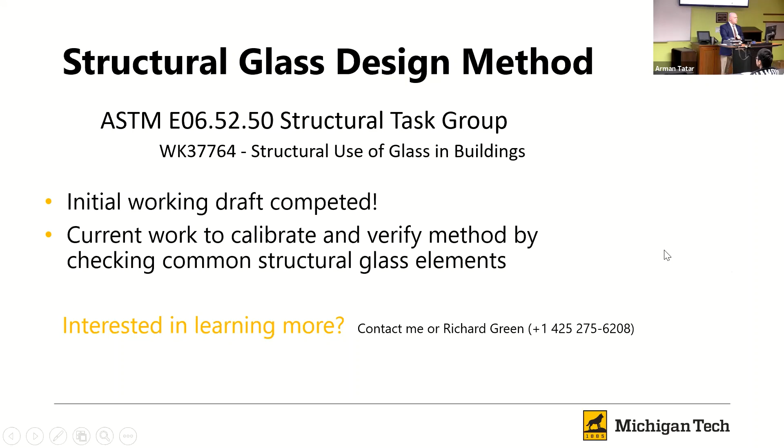Here at Michigan Tech, I am in the process of doing several different types of research, looking at point-supported design procedure, looking at insulating glass units, load sharing when we have partially supported edges. There are various cases - some people specifically design IG units that are two-side supported and trying to account for the stiffness that the spacer provides, and other things. That's why it's partially supported.

Looking at cold rolled and hot rolled curved glass and how we create or calculate load resistance for that. Load resistance of glass with ceramic frits, and also working on trying to get into what is the load resistance of vacuum IGs, because we have this amazing product that does a great job of insulation and it's pretty thin. It'd be great to retrofit some buildings here on campus with that.

Because there's a lot of single glazed windows on campus. But right now, people really don't know how to design it. They don't know what constructions work, what their failure modes are. So I'm working to create a standard so people can use that, and hopefully we'll start seeing that product more widely used in the States.

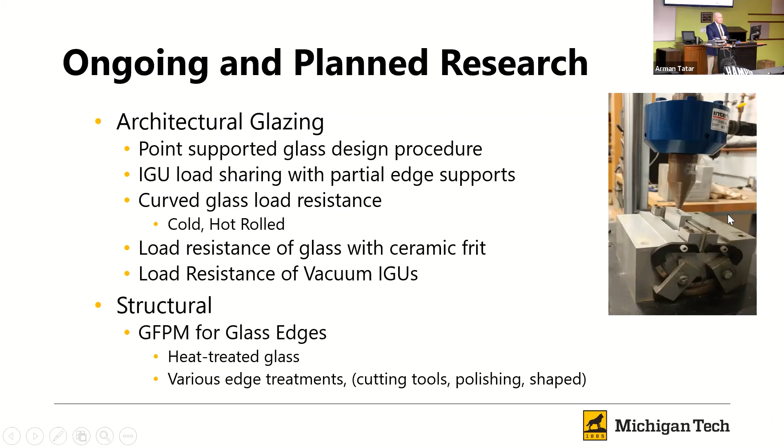On the structural side, we're working on trying to quantify what is the strength of edges for different treatments and different glass types. So this is actually our preliminary rig. We're in the process of making a much larger one and doing bigger samples. So that's going to be fun.

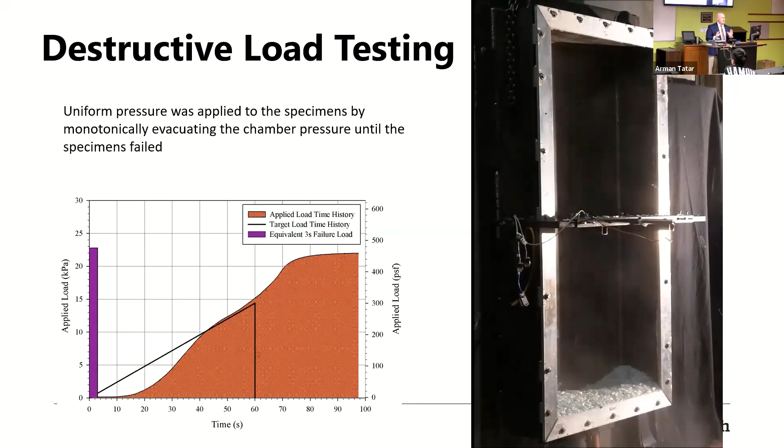I want to share with you, we also have a destructive pressure frame to where we can load a piece of glass to failure. This is a previous one that I've used. But we're in the process of building another one that's going to be a little more modular and accommodate a bunch of different sizes.

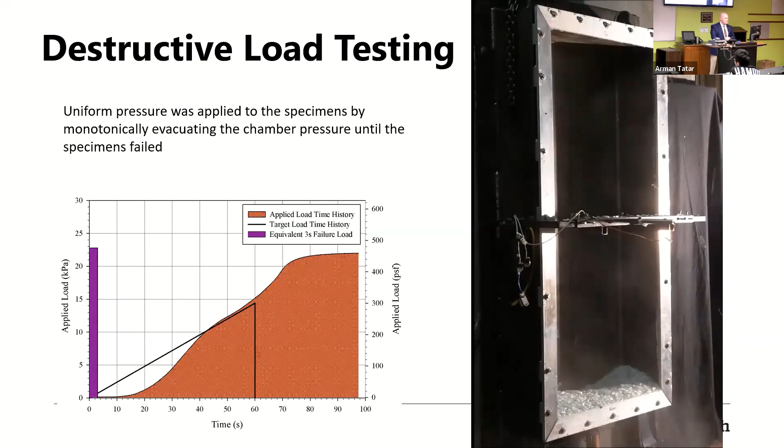So we're looking forward to that coming online this summer. And hopefully we're going to get to test some vacuum IGs in this rig. Pretty cool.

I'm also, with some colleagues, working to create a glass and facade course that we offer here at Michigan Tech. That's probably going to be offered online as well as in class. So that's going to be something that I'm hoping in the next couple of years I'm going to be able to roll out.

And that's going to do more than glass. It'll talk about extruded aluminum, the design loads that we typically have to deal with, facades, environmental loads, capacities, and pretty much whatever we can squeeze in there. So it's going to be a fun class. Because currently, glass and facades is not typically taught in engineering schools, and I want to help change that.

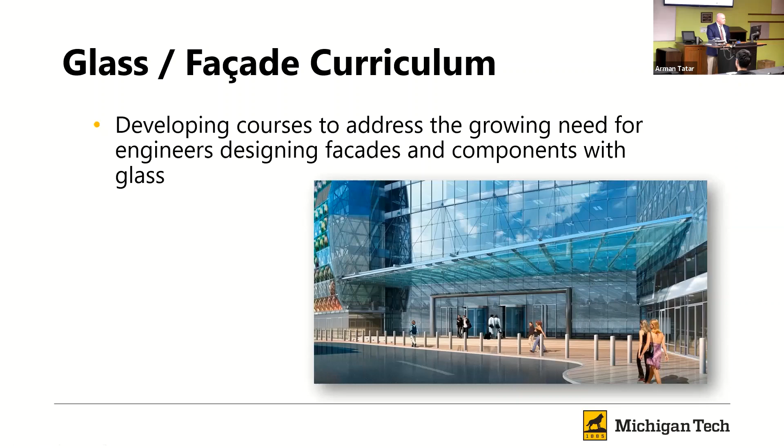Anyway, I appreciate your time and certainly happy to entertain any questions regarding that. I know we ran a little bit over time, but I'm happy to hang out if we have some questions.